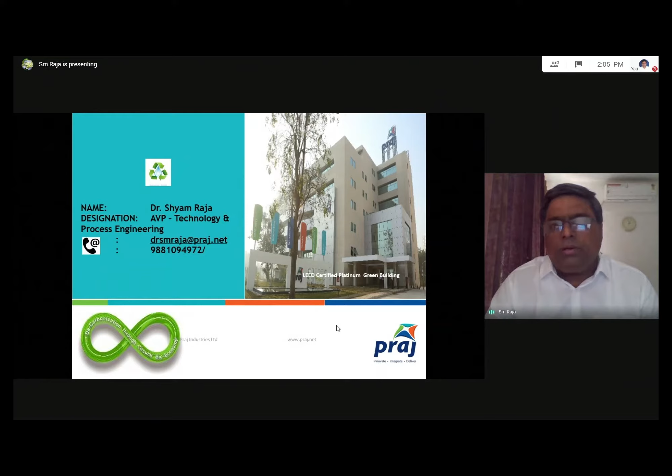I'll also briefly introduce my company where I'm working. I'm currently the Associate Vice President and heading the Technology and Process Engineering department of the Water and Wastewater unit of my company. The company is almost 37 years old, and we have 750 references and presence in more than 75 countries all over the world.

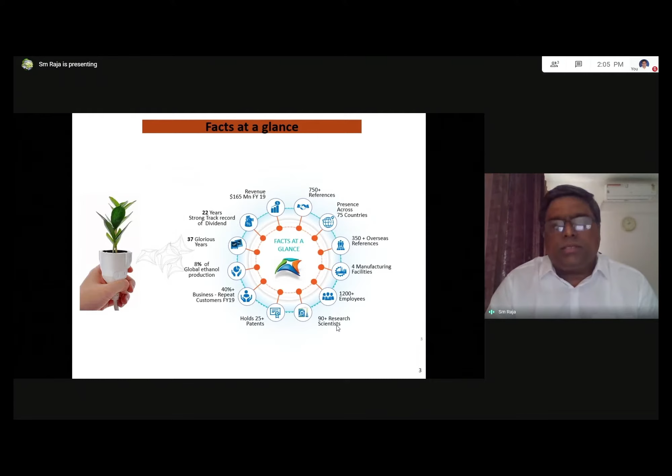Predominantly, Praj Industries is into bioenergy. Basically, we are the leaders in distilleries and breweries. And most of the distilleries and breweries in the country, like more than 70-75%, has been set up by Praj Industries. We have 5 verticals, the main being bioenergy, which is categorized as 1G, that is bioethanol, and the other one is 2G, which is called ethanol for blending with oil, that is basically your diesel or petrol, which is gaining more and more importance now with fossil fuel being exhausted.

The other division we have is high purity, where we manufacture and produce very high purity water, especially for the pharma and cosmetic industries, where they require very, very sterile water for their formulations. We also have a very big fabrication unit, wherein we do fabrication of large equipments, and we supply it to many contractors like L&T and other big companies who are into engineering projects.

One of the main verticals where I am associated is water, wastewater, where we give complete water treatment as well as wastewater treatment solution as a turnkey contractor. We design, engineer, supply, erect and also commission the plant. We also do operation and maintenance of these plants. We are one of the very few companies in India who can offer complete end-to-end solutions in water and wastewater.

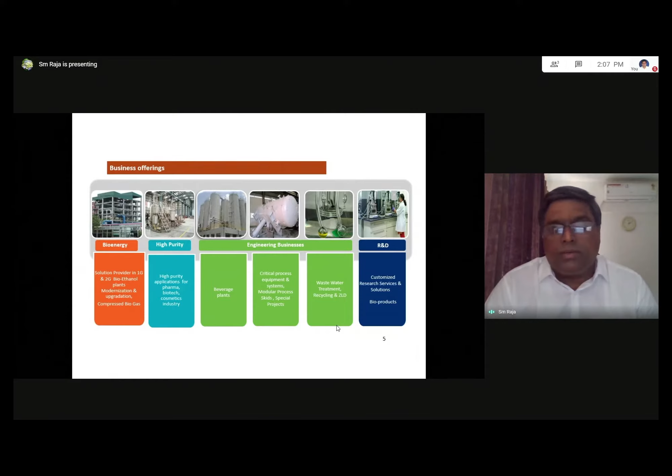We also have a very big facility, this is our basic R&D, which is called Matrix. It's a 100 crore investment. We do a lot of research. We have almost 100 scientists, all of them PhDs, and also a lot of postgraduates who are working on many of the solutions that we offer to our customers.

This includes the development of new products which are more environment friendly and green chemicals. We also have a facility where we can do piloting of the products that we are researching and giving to the chemical industries predominantly. So we have a very large facility where we do all the piloting, and then it is scaled up to the field scale units.

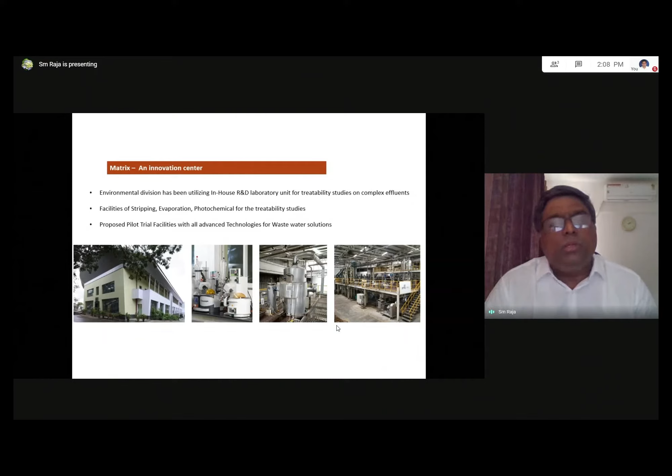Coming to the main topic on water. We all know water, the elixir of life, Amrit, whatever you call it. It has been given all these important names because without water, we don't exist. It's a very precious resource.

So we can understand it's not a finite source... it's not an infinite source. It's a finite source. And therefore, for future sustenance, it is imminent that we need to reduce the consumption of water as much as possible. We need to conserve it. Not only that, we have to also reduce, recycle, and reuse as much water as possible.

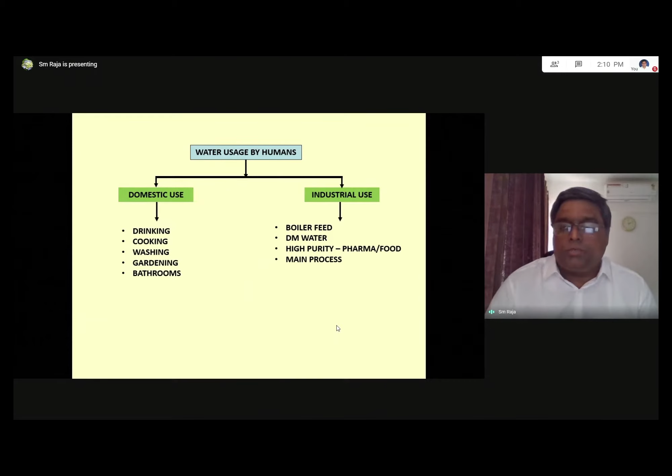So you can see how water consumption is only increasing day by day with both industrialization as well as the increase in population. It may seem very simple, but water chemistry is one of the trickiest chemistries. So there lies your chemistry in this. Water chemistry is very intriguing. It's very difficult to understand, though it looks very simple.

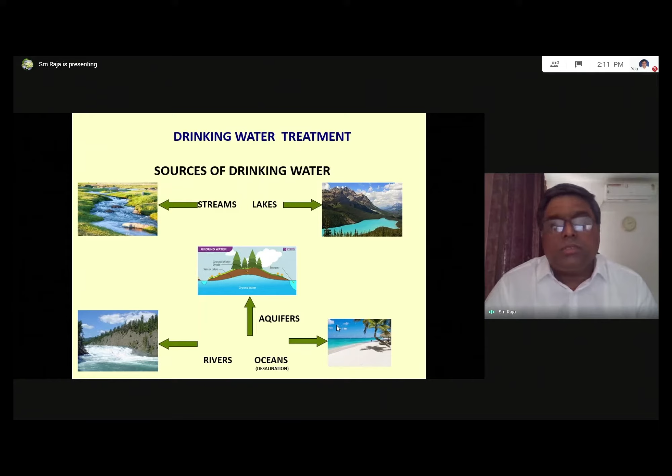When you look at the main source of drinking water, it's the streams, lakes, rivers, and aquifers, which is your groundwater. And then we are looking more and more onto the oceans because the freshwater source is limited. So now we have more and more people putting up desalination plants where seawater is converted to drinking water. This is more predominant in the Middle East, where there is absolutely no source of fresh water. They have to depend on seawater, and the seawater is converted into drinking water.

Let's look at some of the natural contaminants in the drinking water sources that we have. If you look at surface water, that is rivers and lakes, predominantly it contains suspended solids and colloidal matter. So most of the time you find these resources are highly turbid, with a lot of suspensions in the water. It also contains a lot of dissolved iron because iron is one of the most common elements on this Earth's crust. Besides, some of the sources also have color and some sort of mild taste.

There are also resources where there is runoff, called agricultural runoff, like pesticides and other things, which also contaminate the surface water that is available. And of course, pathogens like bacteria, virus, and to a certain extent, algae, depending on what the source is and where it lies. As far as groundwater is concerned, predominantly it is all dissolved. You have very few suspended solids because by the time it reaches the bottom of the aquifer, it is already filtered through the layers of sand and then rocks, so the suspended solids are filtered naturally.

However, groundwater picks up a lot of elements like fluorides, arsenic, nitrates, iron, and a lot of dissolved salts. But in most cases, it is hardness—calcium and magnesium—which causes hardness of the water.

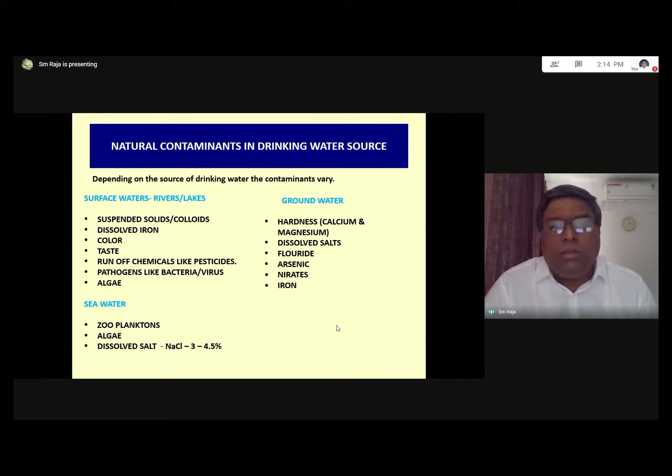And that's why nowadays we are taking a lot of bottled water, which is actually highly treated before it is bottled.

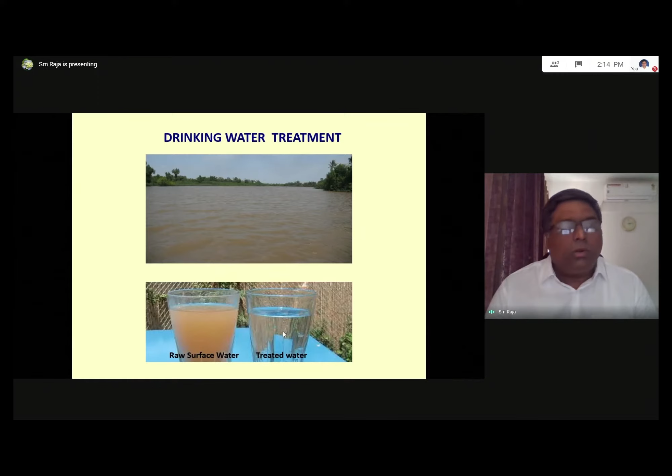The pH should be in the range of 6.5 to 8.5. The taste should also be agreeable, in the sense that sometimes water tastes very bad and we are not able to drink it.

Turbidity has to be less than 1 NTU, that is nephelometric turbidity unit. Dissolved solids—what is desired is less than 200, which is normally soft water or sweet water—but up to 500 you can still make it drinkable. The maximum limit is around 2000 milligrams per liter. So these are all in milligrams per liter.

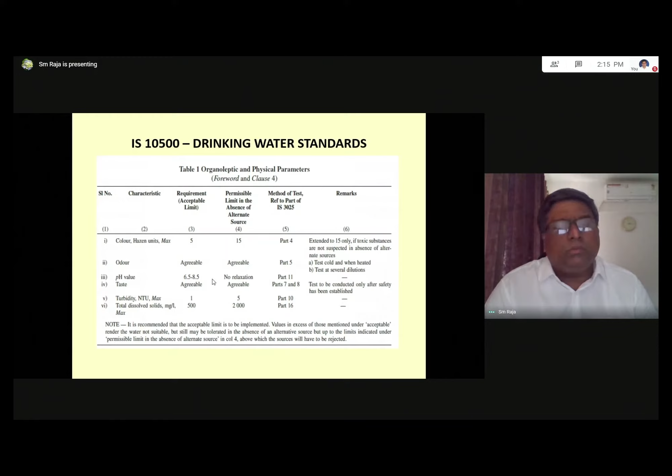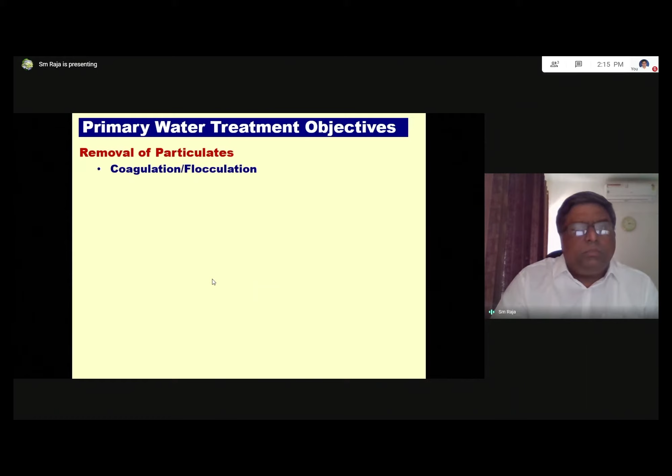So what are the primary objectives of water treatment for drinking? First and foremost, we need to attack the particulate matter, which is the colloidal or muddy constituent of the water. To remove these particulates, we use a lot of chemistry for actually settling this matter.

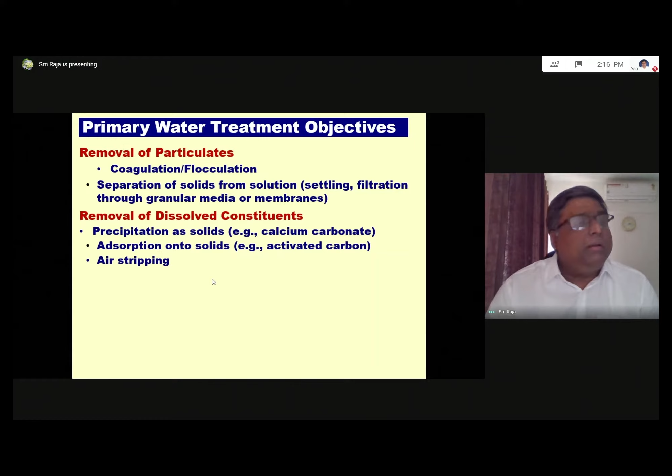If you naturally keep the water for some time in a container, the suspended solids gradually settle down. Then you get fairly clear water at the top, which can be decanted and used for drinking. Still, it will have colloidal matter, which is not desirable to consume.

Hence, there are different steps in the water treatment plant where you target different constituents. The first one, as I mentioned, is removal of particulates, where you add coagulants—essentially iron or aluminum-based coagulants, such as alum or ferric chloride. These coagulants basically break the charges.

All the colloids are normally negatively charged. When you add these metal coagulants, which are positively charged, they neutralize the charge on the colloids. Coagulation helps in discharging these charges on the colloidal matter, and they come together. Since they don't otherwise settle because the density is very low, once they come together they start forming larger particles and the density increases slowly.

To aid this density increase, we add what is called a flocculant. For drinking water, these are generally high purity flocculants—synthetic chemicals, which isn't ideal, but still sometimes flocculants are added. It's called a polyelectrolyte, and it increases the weight or density of these particles so they settle very fast. So you have the first step of solid separation from the water, and that is your settling tanks.

The colloidal matter that doesn't settle goes through a filtration unit, which we call a rapid gravity filter or sand filter.

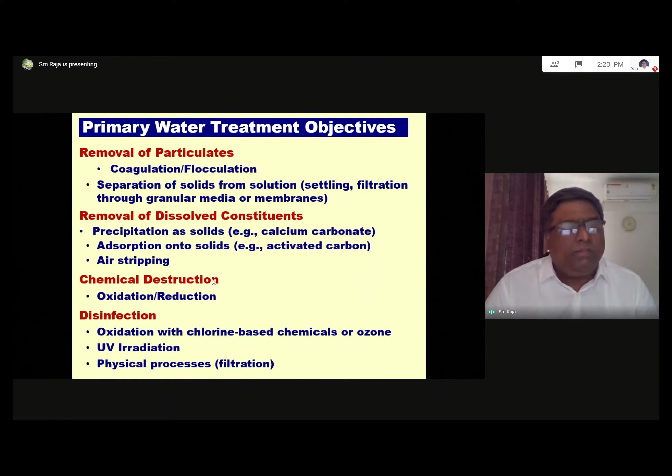So obviously you require mechanisms. You have mechanical screens, also called traveling screens. Then it comes to a lift station where it has to be pumped to the water treatment area, and we provide a lot of pumps depending on the capacity of the water, that is the output capacity.

The raw drinking water is pumped into a coagulation or settling tank, before which chemicals, the chemical coagulants, are added. There's also a pre-chlorination step initially, because there is certain dissolved iron in the form of Fe2+, which needs to be converted into Fe3+, which comes out as particulate matter and can be settled downstream in the flocculation or settling tank. The chemical is added into this flocculation tank where coagulation and flocculation take place, roughly around half an hour, giving time for the chemicals to react.

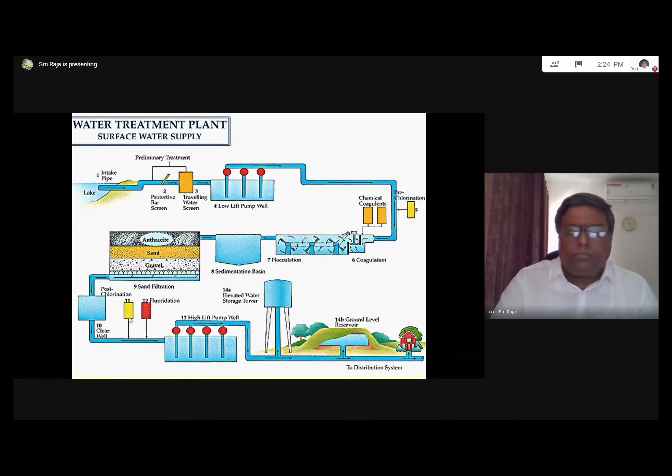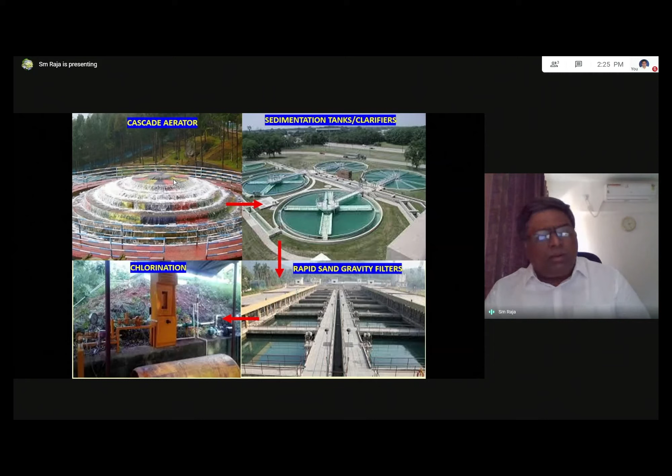It looks like a very beautiful fountain, but actually what is done is the raw water contains iron in the form of Fe2+, and when you aerate it naturally, oxygen diffuses into the water and oxidizes the Fe2+ into Fe3+, which is particulate matter, and the iron particles settle on these steps. So basically you are converting dissolved iron into particulate iron and taking it out before it goes into the sedimentation tank or the clarifiers.

So on the right side you see the sedimentation tank, or what we call clarifiers, which are generally circular in structure. So these are the mechanisms.

Water after the cascade aeration comes here, and before entering the sedimentation tank, you have flocculation and coagulation of the particulate matter. So here it comes and settles, and what you see here is the clear water, which just overflows and comes into the rapid sand gravity filters.

So these are large filter houses. This is the filter house, and these are the series of filters, and the water is filtered through this sand filter, and the filtrate is collected at the bottom, and from the bottom is taken into a chlorination unit.

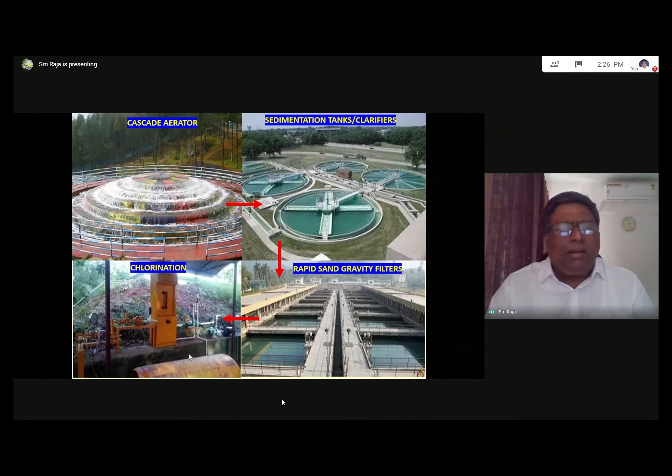For very large plants, you have gas chlorination. So you have these gas cylinders full of chlorine gas, and chlorine is taken out. We have a separate chlorination unit from where the chlorine from the gas is taken into this smaller unit and dosed into the water. So that ends the treatment part as far as drinking water is concerned.

Now for groundwater, as I told you earlier, hardness can be removed by boiling. It can also be removed by a resin bed, which is essentially what we call a softener—these are ion exchange resin beds that exchange the calcium and magnesium. For the permanent type of hardness, we need to go in for lime soda softening, where the calcium and magnesium is precipitated out.

There are many cases where groundwater is contaminated with arsenic, which is very poisonous. Then you have iron, and you also have fluoride, which is one of the main contaminants. We are quite well aware of the problems of fluoride in Puttaparthi itself and many places in Andhra Pradesh. Fluoride is a big concern as it causes fluorosis and other complications.

These components can be removed by chemical precipitation, filtration, adsorption, and ion exchange resin beds, and also membrane processes, which is reverse osmosis. RO is one of the most sophisticated technologies for removing most dissolved components, including monovalent ions like sodium and chloride. For dissolved solids, you have to go in for softening, and then ultrafiltration and RO.

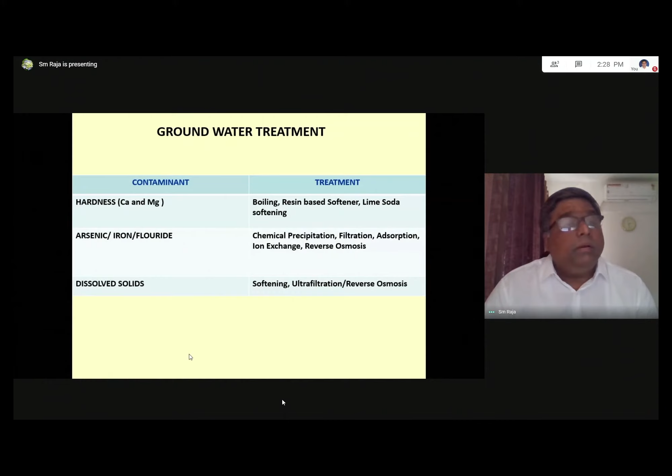Then you have the demineralized plant, that is DM water, again an ultra pure water. You have to take it through a series of beds, anion cation exchange bed, and then mixed bed. Further it is taken into the end use, where again they require very low percentage of cations and anions. Then for pharma applications, as I told you earlier, you require sterile water and high purity water, which again is a separate treatment technology altogether.

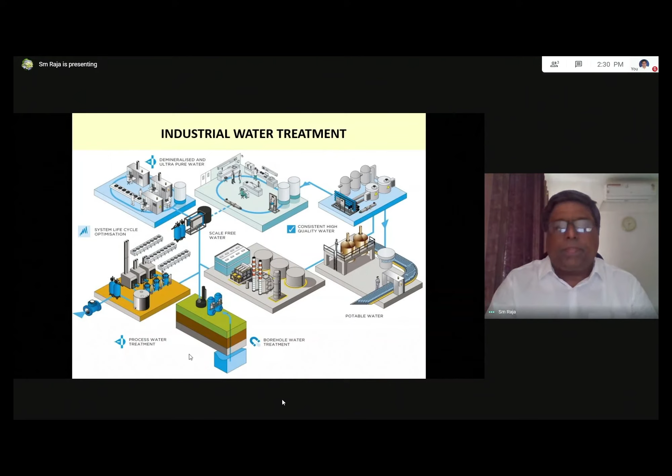Now, more and more corporations, and as organizations and cities and populations increase, there is very little water available. All these cities near the sea are looking at seawater as the main source of drinking water. This is predominantly true in most Middle East countries where there is absolutely no surface water source available. Even if you've gone through the news a couple of weeks back, even in the USA, in California, they are water starved, and water has become a commodity for trading. So you can understand the future we are going into if you don't have a source of water.

Seawater is extremely expensive to treat because it has to go through sophisticated technologies like UF and RO, and at the end of it there is a byproduct which is highly concentrated and full of salt. How do you dispose the salt? That itself is a big problem, a big challenge. So things are not that easy. At the same time, if we are able to recycle and reuse most of the water, that is going to be our solution.

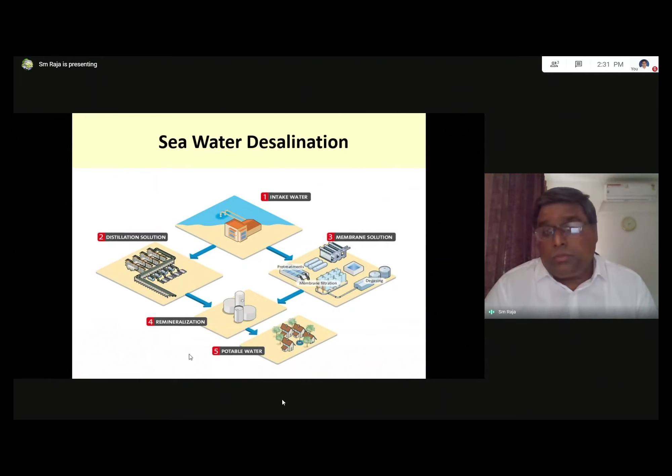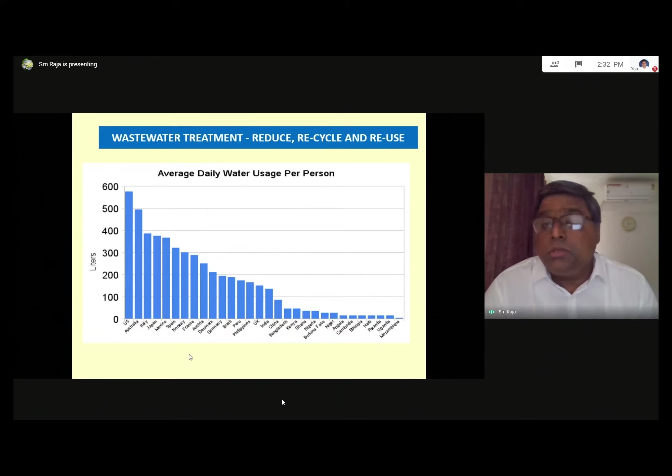If you see the graph, as countries become less and less developed, the water consumption also reduces, predominantly because treated water is not very cheap to buy. As water consumption reduces, it means all these countries getting less water, either because the source is limited, or their water treatment facilities are limited, or they are in a water starved and water stressed area. India is one such water stressed area, and it has been said that in future India is going to go through a very difficult time satisfying the water needs of the majority of its population. So it's very important for us to understand how water has to be conserved and used as little as possible so that we conserve this water for our future generations.

So unless you use water, there is no wastewater generated, right? So wastewater is nothing but the water that is used and wasted either by human activity or industrial activities. Essentially it means you use highly treated water, you contaminate it through different types of uses, and then this contaminated water is just disposed, and generally it is left to nature to take care of it. Of course nature takes care of it, but only to a certain limit. It cannot go on doing this forever unless we intervene and take responsibility for the waste that we generate.

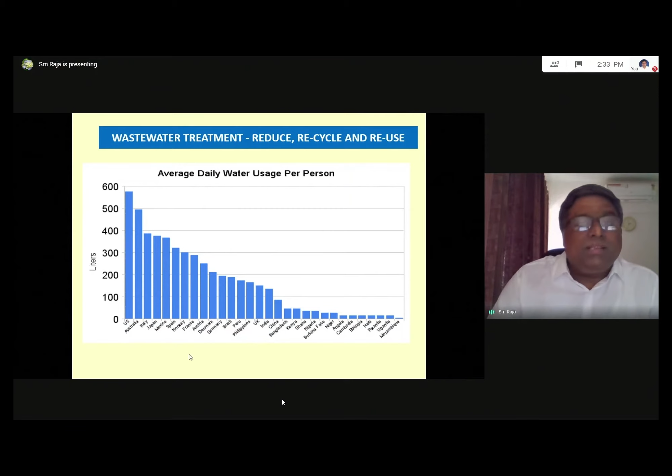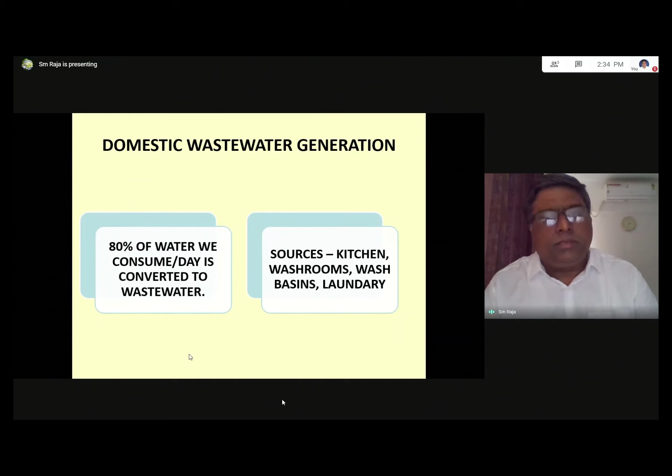So I will now come into wastewater treatment, which is very important. I think it's the most important subject for all of us to understand, because we are all equally responsible for the amount of waste that is generated in the country and all over the world. 80% of the water we consume as drinking water is converted to wastewater, and it predominantly comes from our bathrooms and toilets. The source in domestic wastewater is kitchen, washrooms, wash basins, and laundry. So imagine you take 100 liters of water, only 20% is used for normal consumption like cooking, and 80% becomes wastewater. If you calculate per capita generation, you can imagine the amount of wastewater generated - it runs into millions and millions.

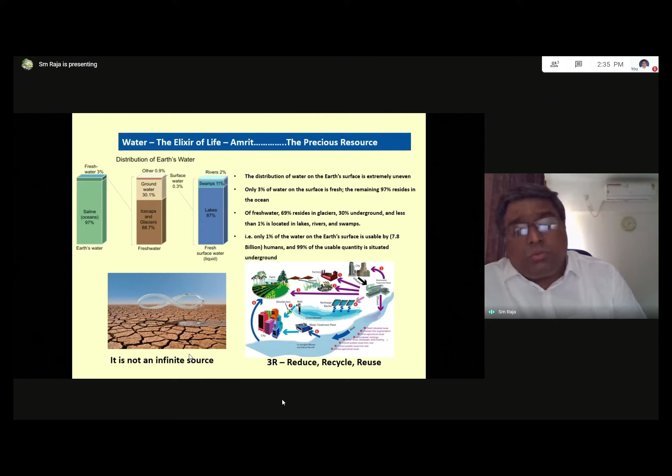So I would come back to the first slide about the state of water availability, where I said it's not an infinite source, it is a finite source. We need to be very serious in conserving water at source and minimizing wastewater. Even though you cannot eliminate wastewater - it's going to be there - the question is how do you manage it. So it is best that we follow the principle of 3R: reduce, recycle, and reuse. There is no other option left.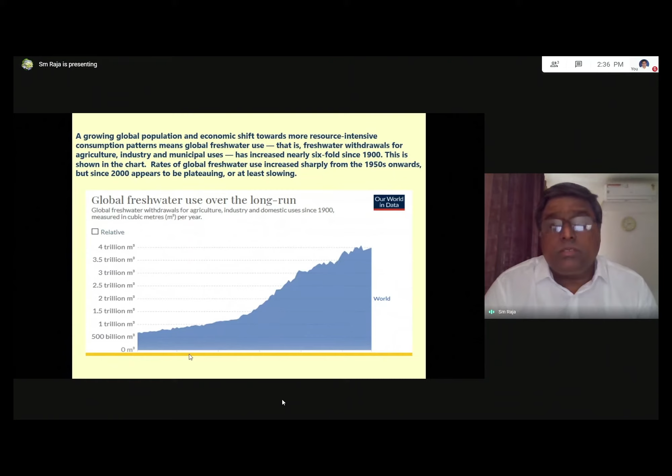So we come to the topic of how to treat domestic wastewater. I'm not going to touch on industrial wastewater because it's a very vast subject, and the more the usage, the more complicated the wastewater becomes in terms of its components and constituents.

If you classify domestic wastewater in terms of generation, you have two major classifications: one is called black water and the other is gray water. Black water is the urine and feces generated through toilets. Whereas gray water is predominantly from washing - your laundry, bathing, and kitchen. You can segregate these two and recycle separately, or mix them together and treat as a single domestic wastewater. It all depends on the place and the ultimately treated water quality required for where you're going to use the treated wastewater.

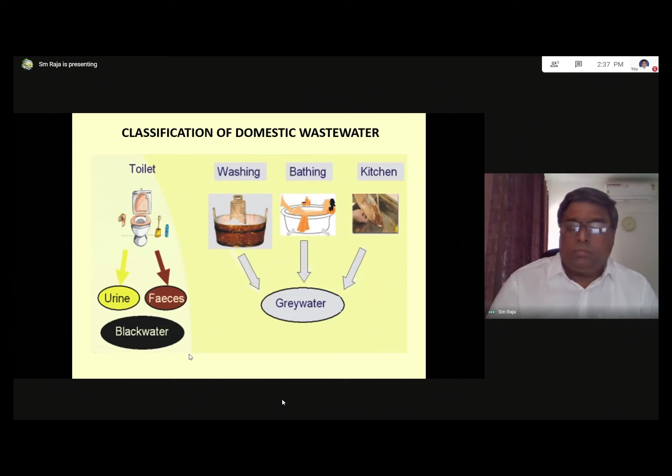Now the typical composition of sewage, domestic wastewater - the contaminants are predominantly suspended solids, which we've seen is also part of drinking water treatment, but different from the suspended solids in drinking water. You also have dissolved organics, classified as BOD and COD. BOD is biological oxygen demand, COD is chemical oxygen demand. Both are essentially the same, only depending on analysis and the constituent it is segregated. It's very difficult to individually know what the contaminant is - I cannot keep analyzing each and every component in the wastewater. So best is to take a parameter which defines the amount of contaminant, the scale of contaminants.

And so the biological oxygen demand or BOD concept has come, where we know that when this water is without treatment, if left in any water body - either lakes or rivers - there is a biological oxygen demand needed to naturally degrade these organics.

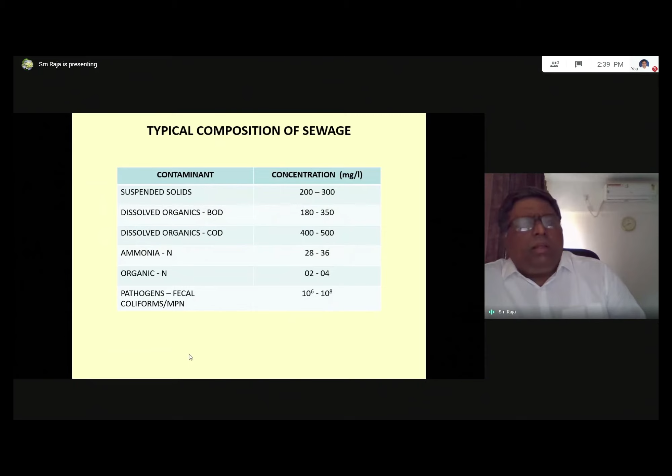So that is called the biological oxygen demand. There is an analysis which gives you how much is the BOD, and it's normally in the range of 180 to 350 milligrams per liter. Chemical oxygen demand includes the BOD, but it also includes the organics which are non-biodegradable. So COD will always be higher than BOD, around 400 to 500 milligrams per liter.

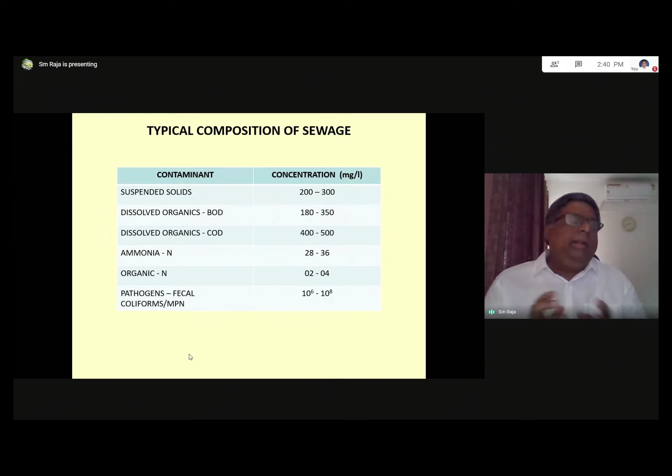And then we have ammonia, which comes from your amino acids, your proteins, what you eat, your digestion and byproducts of digestion, predominantly nitrogen and phosphorus. So your sewage will contain ammonia, nitrogen, organic nitrogen, and also phosphorus. And then the most important is your pathogens, your fecal coliforms and MPN. So these are all indicators of the level of contaminants in a domestic wastewater.

In a sewage treatment plant, there is a typical flow sheet where, depending on the constituents that you need to separate or treat, there is a flow sheet that has been developed, which is a very conventional flow sheet.

Most of the sewage generated from the household is collected through drain pipes. Earlier there used to be septic tanks, but septic tanks also became a problem because the overflow ultimately goes into your groundwater and contaminates it. So in large cities and municipal corporations, you have a sewerage connection system where the sewage from all these households is collected and conveyed through pipelines to a centralized sewage treatment plant, where all the contaminants are treated stage-wise.

When there is conveyance, whether through a pipeline or an open drain, which is normally not there anymore—nowadays open drains are not permitted, it is generally through underground pipes—it contains a lot of floating matter because people just push everything into the toilet. When it comes to the end of the pipe, where it enters the sewage treatment plant, you find all sorts of things irresponsibly put by people into the toilets. They just flush it through. So it contains a lot of floating matter which needs to be removed.

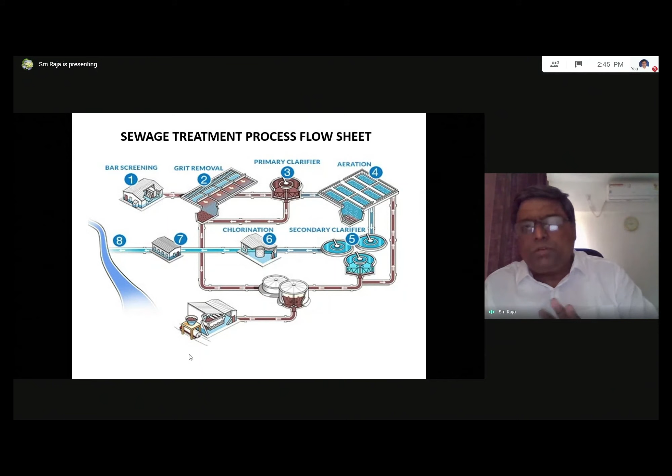So the fundamental principle is that after treatment in a sewage treatment plant, all this treated water will get diluted further, either in the receiving water body like a river or a lake or any other water body where there is some source of fresh water also coming in.

So as I told you, I'll just run through the flow sheet. This is the pre-treatment, and you can see there is a screen, a mechanical screen, where continuously it removes the floating matter from the sewage, and the floating matter is separated from the water. And then it comes into a grit chamber.

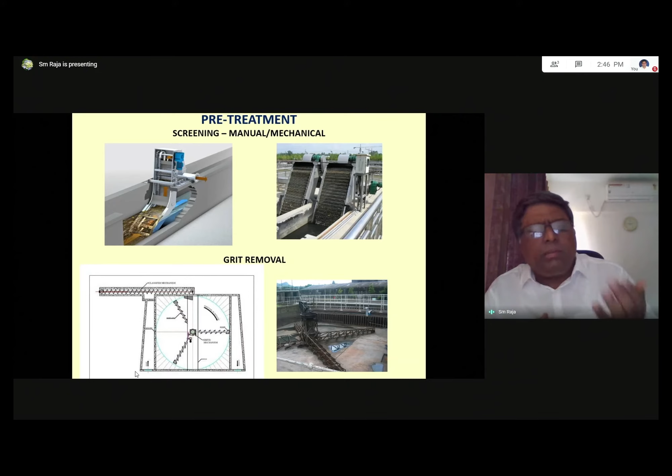The grit chamber is basically again a sedimentation tank, and in it the grit is removed at the bottom. There is a scraper from which the grit is scraped at the bottom and taken to a central point, from where it is again separated from the organic material, because the sand also contains a lot of organic material. So you have a rake classifier where it separates the actual sand from the organic matter. The organic matter is returned back into the sewage treatment plant.

And after the separation of grit and screenings, it goes into primary treatment, the primary clarifier. It's essentially again a civil tank, an RCC tank constructed in a circular configuration. It could be rectangular, but circular is easier because you have the rake mechanism—mechanical equipment with a motor and gearbox that rotates at the bottom very slowly, because whatever settled sludge is there has to be taken into a central well from where there is a pipe for discharge of the sludge.

So this sludge from a primary clarifier is very rich in organic matter. It is full of calories. So it goes to a sludge digester where it is anaerobically digested downstream, and you can generate biogas from the anaerobic digester of the sludge.

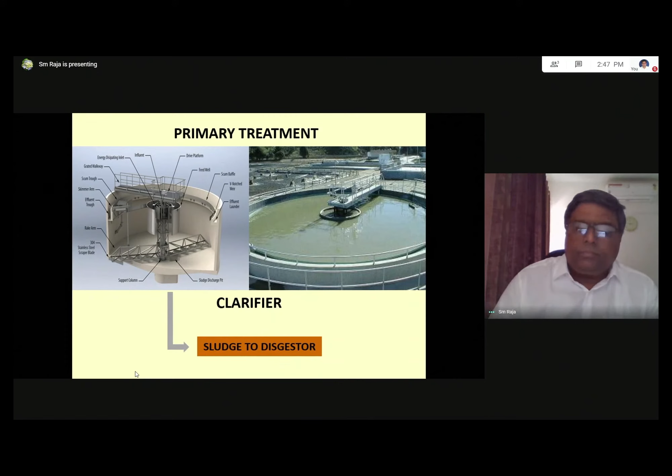So once your suspended solids are predominantly taken off from the water, the next step is to remove the organics, that is the BOD and COD. And as I told you, there's a typical aeration tank. These are again all RCC tanks which contain the domestic wastewater.

And you have the aeration system where you have a blower along with fine bubble diffusers. The fine bubble diffusers are given because you need to have the efficiency of the blower to reduce power consumption. Just to give an idea, in any sewage treatment plant the maximum cost of treatment goes for oxygenation, that is the air blower. You have to have massive air blowers to supply the amount of air required for the bacteria to oxidize the BOD and COD organic materials and treat the water, reducing BOD and COD in the treated water outlet. Hence almost 60% of the energy used in the sewage treatment plant is only going for providing air for the aeration system.

So once the aeration tank performs, and the microorganisms perform the duty of removing the dissolved organics, it is taken further into a settling tank where the sludge is settled and the clear water comes out of the clarifier, which is predominant—more or less very clear except for some particulate matter again. So if you see the comparison between drinking water and wastewater treatment, the units for the settling tank remain almost the same.

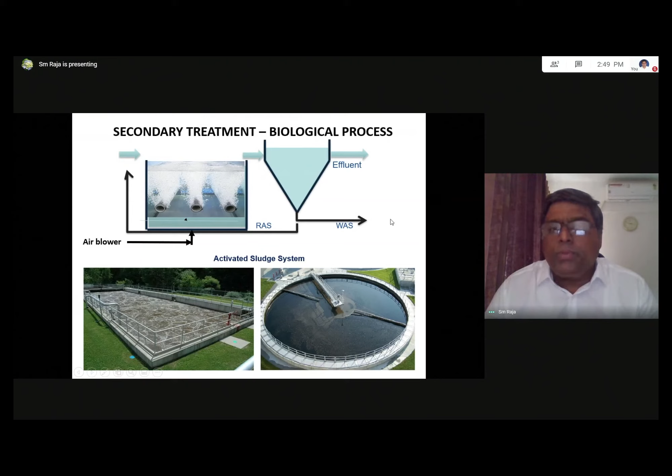Part of the sludge is recycled back. This is called return activated sludge, because you have to maintain a concentration of around 2,000 to 3,000 milligrams per liter of biomass in the aeration tank. The excess biomass that is generated is wasted.

Here again it's an anaerobic system. There is no oxygen, so in absence of oxygen the biomass gets into an endogenous phase where it becomes cannibalistic and eats itself. But in that due course it goes through a series of biochemical reactions, and finally you have methane as the gas, the biogas, which is predominantly methane, carbon dioxide, and H2S to a certain degree.

But essentially it is all methane which can be used. The effluent gas is collected at the top because the gas will go up, and it can be taken into a gas holder from where it can be reused, either for cooking or to generate electricity through a dual fuel engine. So a lot of plants today are going in for biogas recovery from the waste, because ultimately every wastewater treatment is full of energy, and there is a lot of organics present in the wastewater.

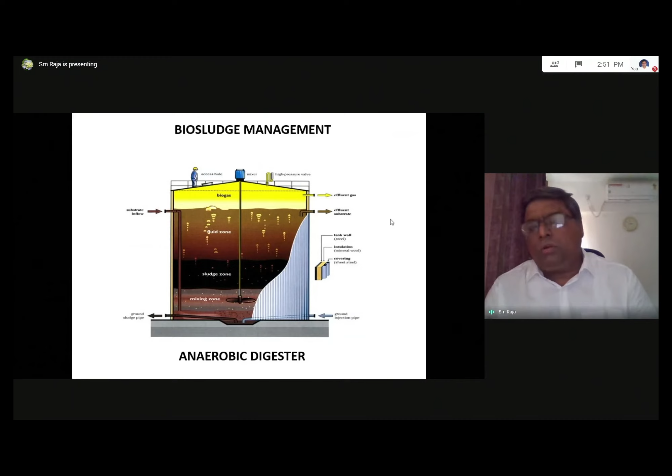And what happens to the digested sludge? The digested sludge is further dewatered. All the water component is removed, and you see to it that you have maximum solids in it so that the volume of the waste reduces. There's a cost attached to transportation of the sludge also.

Then it is given hydrothermal treatment, wherein you can convert the biosludge into solid fuel, which can be used back into industries like biorefinery. It can go into a lot of other uses like electricity generation or a source of heat, and also it can be used as natural fertilizer. A lot of this digested sludge is taken by local farmers and used as fertilizer for their fields.

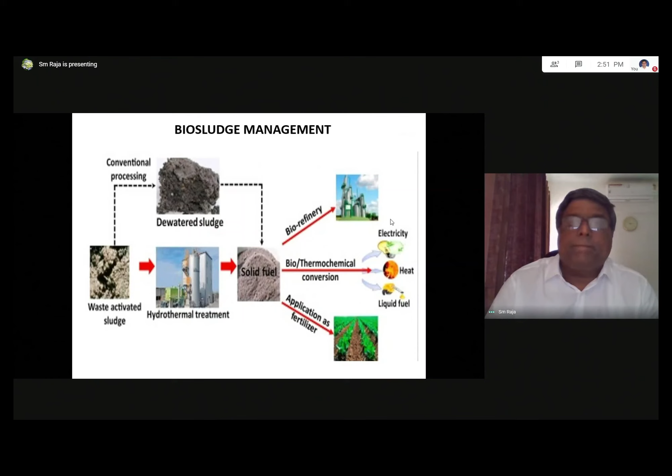Now the treatment doesn't end there after the biological system, because if you have to reuse the water, most of the treated sewage is used back into gardening. It can be used for toilet flushing, for car washing, and as cooling tower makeup by industries. So there are various uses of this treated water.

Instead of using fresh water, you can as well use the sewage that is treated and reuse it back into these non-potable applications. And this is what is done predominantly all over the world today, because most of the sewage that is generated, they are trying to reuse as much as possible.

So for getting the quality of water where the reuse quality needs to be better than the secondary treated water, you go for a tertiary treatment. Again, the tertiary treatment is predominantly filtration. You have sand filters, and post-filtration you can chlorinate, or even chlorinate before it goes into the filters.

And then you can use ozone, or you can use UV also as a disinfectant, where your treated water becomes completely pathogen free. Even if somebody touches it by mistake, it is free from any hazards. Otherwise, if it's untreated, it is a hazard for health.

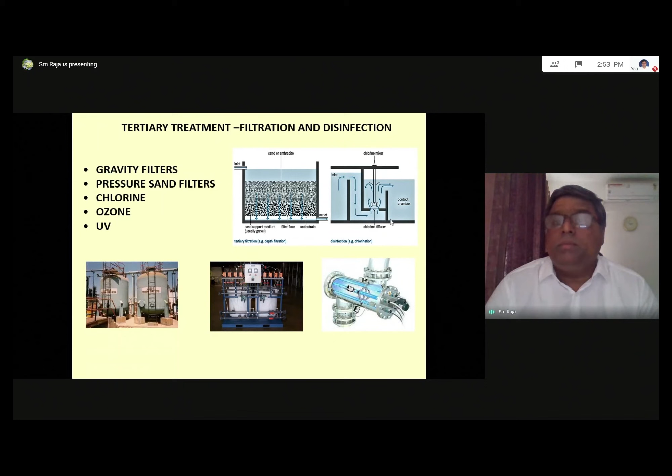So similarly, like drinking water, there is an Indian standard formed by the Central Pollution Control Board, where your treated sewage water or treated water in terms of industries also has different standards. But treated sewage has to meet certain standards based on the point of discharge. If it is inland surface water, the concentrations of components like oil and grease, particulate matter, ammonia, nitrogen, etc. are different.

If it is the public sewers, which means it goes downstream for further treatment, then it is different. You can use it for land irrigation, where the treated water quality is slightly more relaxed, because ultimately it is used up by the soil and the plant. And for coastal disposal, again there is a different standard. So the standards have been very well laid by the Pollution Control Board, depending on the point of discharge of the treated water.

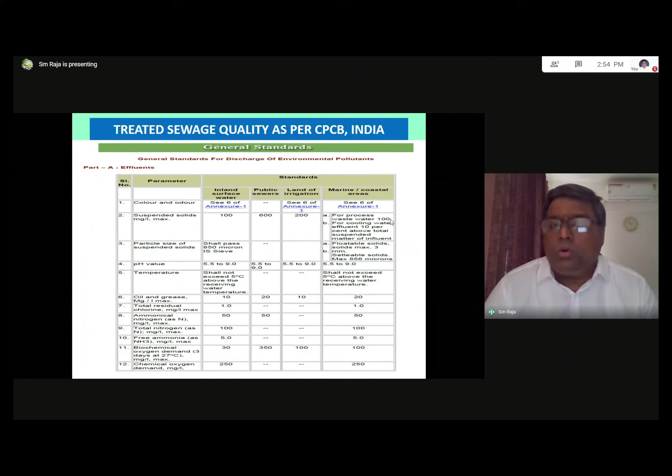So can we treat this water to drinking water standards? That's a big question everybody has in their mind. Yes, we can treat domestic sewage to a purer form of drinking water, which will be much purer than what you're currently getting from your source, either groundwater or freshwater.

This is being done in Singapore, where sewage is treated into drinking water. It is bottled and given to people who visit their plant. But the only problem is there's a psychological barrier where people do not want to drink it.

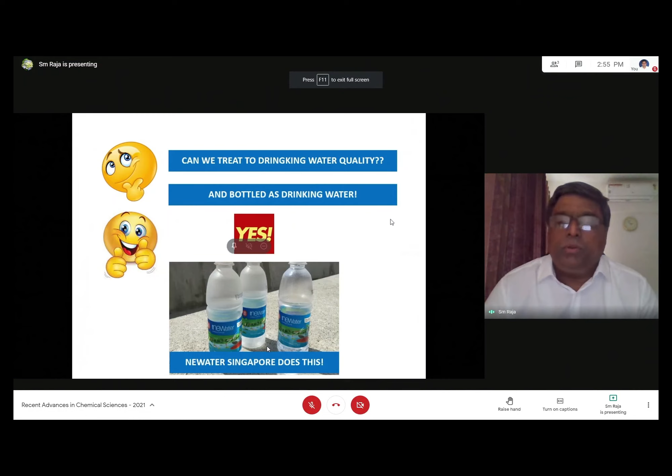But I can tell you this is purer than most of the drinking water we receive in our houses. So they are encouraging people to reuse sewage back into drinking water. It's absolutely safe, odorless, tasteless, and very pure. So maybe this may be the future, as I told you, water has already started getting traded.

Some of the hard facts we need to know about wastewater treatment plants are that they are highly capex intensive. Instead of providing all this equipment, it is not cheap, it is very expensive. The operation cost is also very high, because 60% of the operating cost is only for the biological system, the air blower itself. Then you have the power requirement for pumping and other equipment like agitators. So it's highly OPEX intensive.

There are also large quantities of chemicals used, like chlorine for disinfection. We have ozone, which is also very expensive. And then there is no resource recovery. In all conventional wastewater treatment plants, there has been no resource recovery as part of this waste treatment plant.

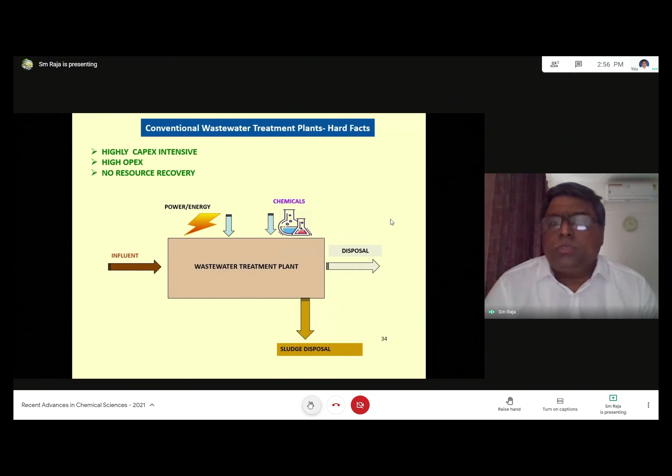So if you look at this diagram, it shows that it is highly power and energy intensive. It uses a lot of chemicals, and the treated water is simply disposed. There was no thought from the municipal corporation to reuse it, and the sludge was being disposed in some landfill, where it will again go back into the soil.

So what is the future? The future has to be a circular economy, the only option we have for sustenance. We need to recirculate the water. We need to recycle the water. We need to recycle the nutrients present in wastewater. We also need to reuse the energy, meaning we need to generate energy from wastewater rather than using energy to treat the wastewater.

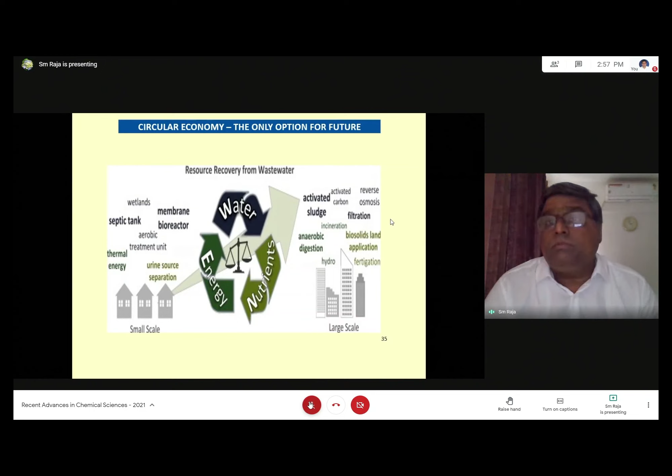So there's a lot of paradigm shift in the thought process. There's a lot of work going on, and in the next 5 to 10 years, you will find that most sewage treatment plants will become a source of energy generation rather than a source of energy sink. So we are going towards that end.

So some of the recent advances, as I told you, a paradigm shift is to use less chemicals, generate electricity, and generate byproducts in the form of bioplastics and fertilizers from the sludge. And you can go for zero liquid discharge where not a drop of water goes out of the premises. It is 100% recirculated and recycled back to non-potable or potable use, if people are okay to drink it.

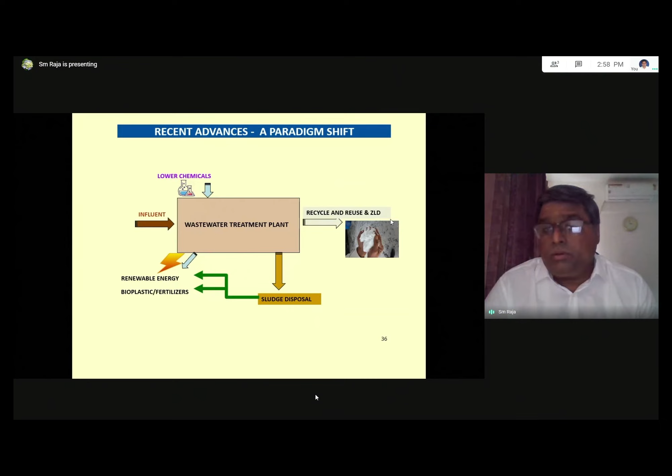Also evaporate the small volume of waste generated, because all these recycle plants require a reverse osmosis plant where there is a portion called the reject, which is basically concentrating all the salts and converting most of the water into very high purity water through the membranes. But the reject has to be managed, going through an evaporator where you evaporate this small quantity of water. The byproduct of the evaporator is salt, so all your salts, predominantly sodium chloride, will again be recovered from this wastewater treatment plant.

So the entire focus has now shifted to make the wastewater treatment plant not a place where all the resources are being used, but to generate resources and preserve all our valuable resources that are already there.

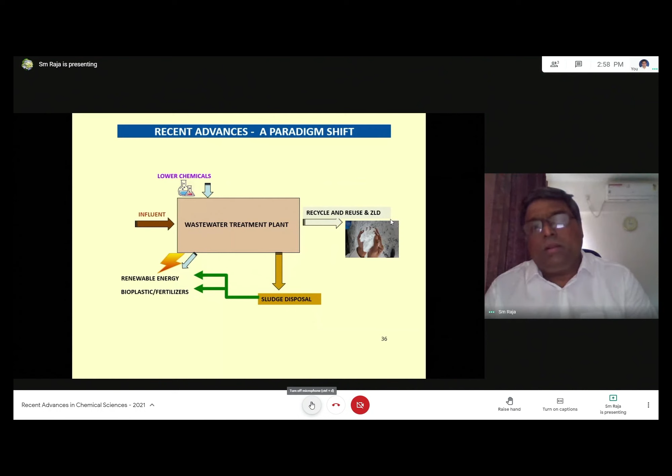We have 5 minutes to conclude, sir. What are the drivers of this paradigm shift? One is reduce at source by segregated treatment, which also reduces the cost and complexity of treatment. Another is reduction in energy consumption, since 60% of the energy is used for aeration.

So you have new technologies coming in, wherein you have anaerobic and aerobic combination. Anaerobic doesn't require much energy, in fact it generates energy. So a lot of thrust is being given to use anaerobic and aerobic as a combination to reduce the net energy consumption, and in fact to generate energy.

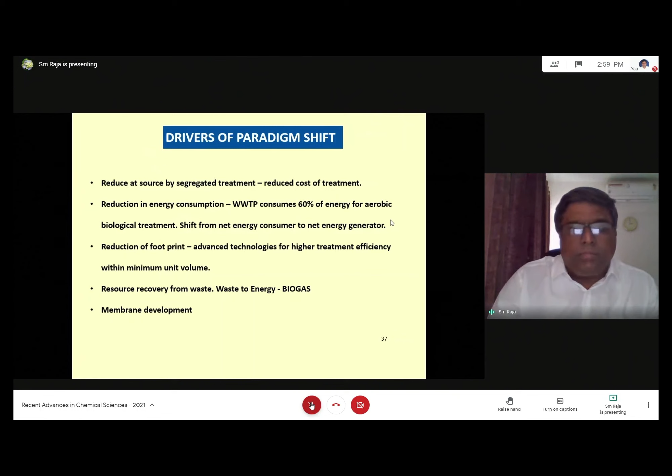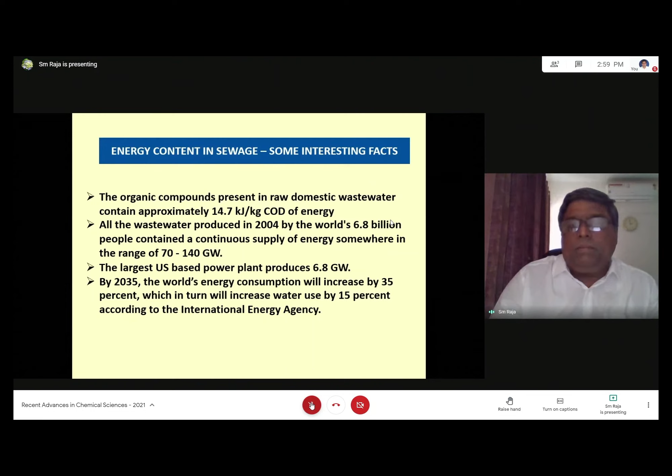So if you see the reduction, also reduction of footprint and resource recovery from waste. These are some of the latest developments going on. Just to give you an idea, the organic component is almost 14.7 kilojoules per kg COD of energy, and from that you can generate so much power. You can generate as high as 140 gigawatts of power from the wastewater treatment plant. This is going to be a reality in the future, in the next 10 to 15 years.

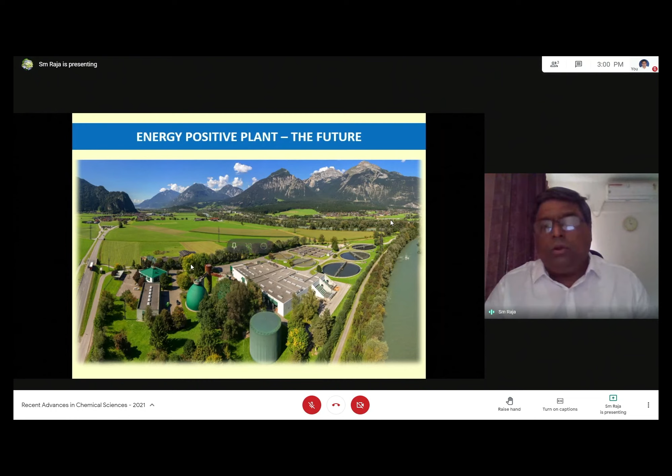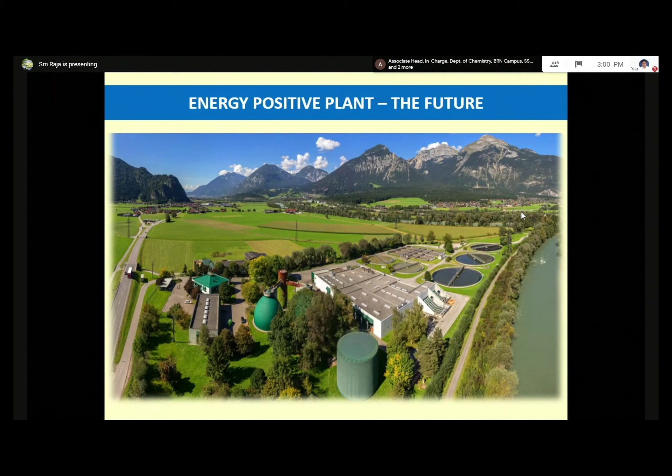This is one plant where the entire plant is energy positive. It is generating energy and supplying it to the grid, and it is not consuming any energy. It is generating its own energy and using it in the plant, so there is no energy being taken from the government supply. In fact, the excess energy is being given back to the grid.